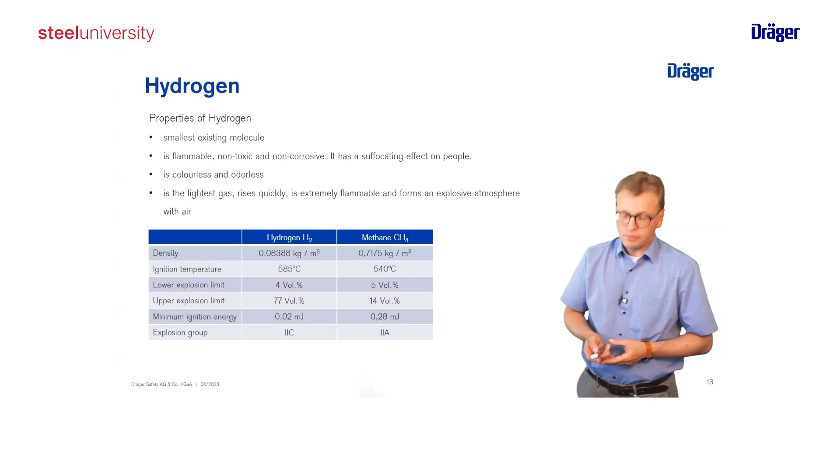When we speak about this, we have two sides. On one side we have the employer, you as a company using or dealing with production. On the other side we have manufacturers, like Dräger, who supply manufactured devices which can be used in explosive atmospheres. I will highlight now 3 standards which are relevant.

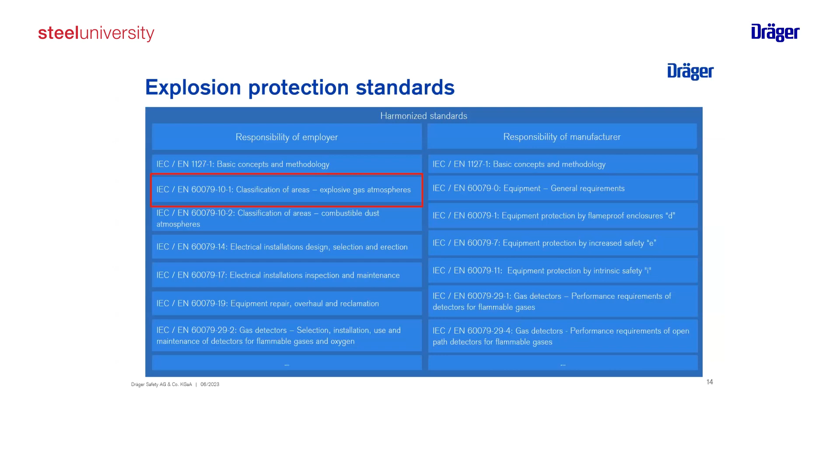The first is, if we speak about explosive gas atmosphere, we need to classify the areas so that we know how high the risk is, what's the probability that an explosive atmosphere can arise or be present. There is IEC EN 60079-10-1 for gases. Another one we will also cover in this presentation is IEC EN 60079-29-2. This is about gas detectors, meaning selection, installation, use, and maintenance of detectors for flammable gases and oxygen.

If you have guidance on how to select, I think we also need a standard which defines the performance, so to define criteria for detectors which can be used, linked to the selection process. So these are, I would say, 3 relevant standards, and later in my presentation we will see or hear about the content and meaning of these.

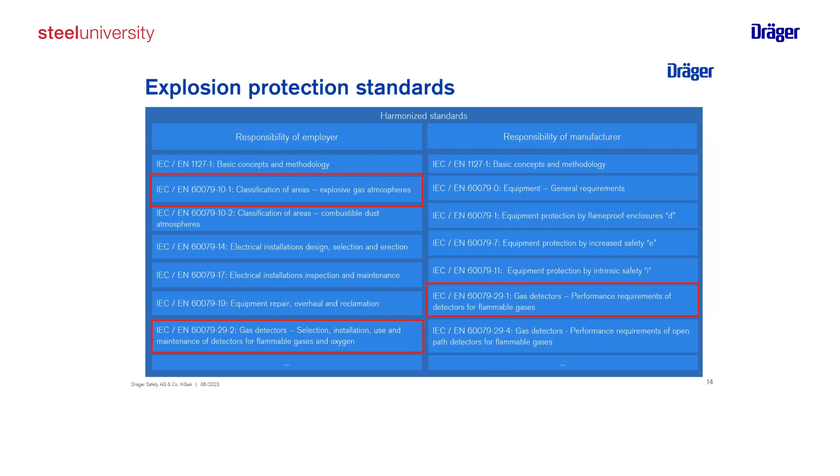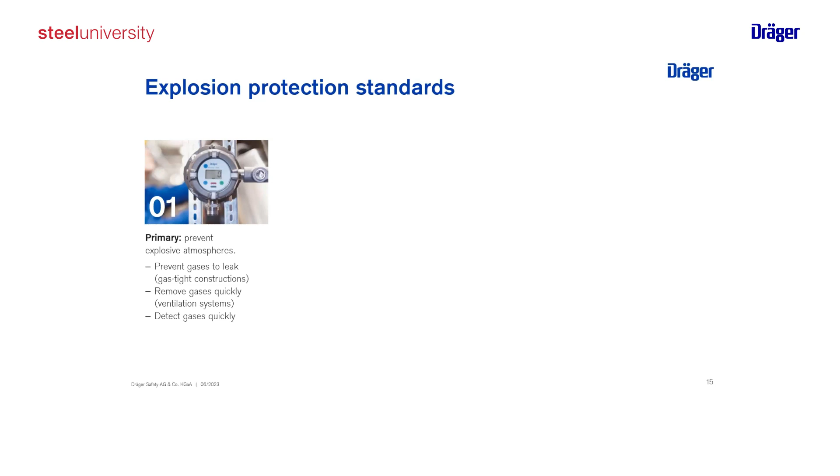Okay, so we want to do explosion protection, and what we always do there is speak about primary explosion protection. The idea is always first, we want to prevent explosive atmosphere. Or put it the other way around: you're dealing with substances which can form an explosive atmosphere, but maybe there are possibilities to prevent them from reaching a level where there is an explosive atmosphere.

This can be achieved by designing your processes or equipment so that they are gas tight, so the probability is very low that you'll have a leak. Or you use ventilation to remove gases from the application, or you use detection to pick these up and activate measures to keep the area free of explosive atmosphere. So this is the primary pillar - we want to prevent the formation of explosive atmosphere.

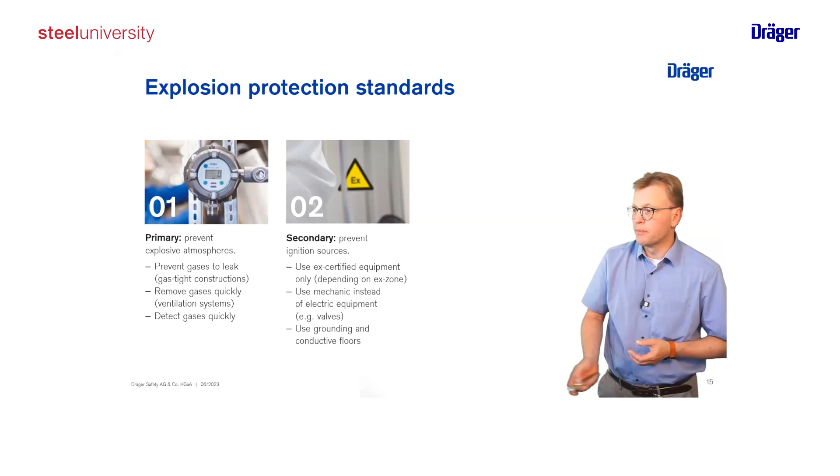The second, if we can't avoid this because it's part of the process that explosive atmosphere could be present, then at least we have to prevent that ignition sources are present - equipment which could ignite our explosive atmosphere. For this we use Ex-certified equipment only. When we define and have identified the probability of an explosive atmosphere and have defined the requirements for the equipment, we can select the right equipment which can be used there. We also have to secure that electric installation, grounding, etc. is done properly.

If this is all done, but nevertheless there could still be the risk of an explosion, then the third level is what we call constructive measures. So we design our application, our processes, so that the propagation is reduced, the effect of an explosion is limited - using materials which are fire retardant or fireproof, pressure release valves or breakthroughs in the wall, so the pressure is released and we don't have a collapse of the building.

For our presentation today, it's important that we concentrate on the primary pillar here - we want to prevent. And as we speak about gas detection, the good message is here.

I can't use the pointer. Sorry.

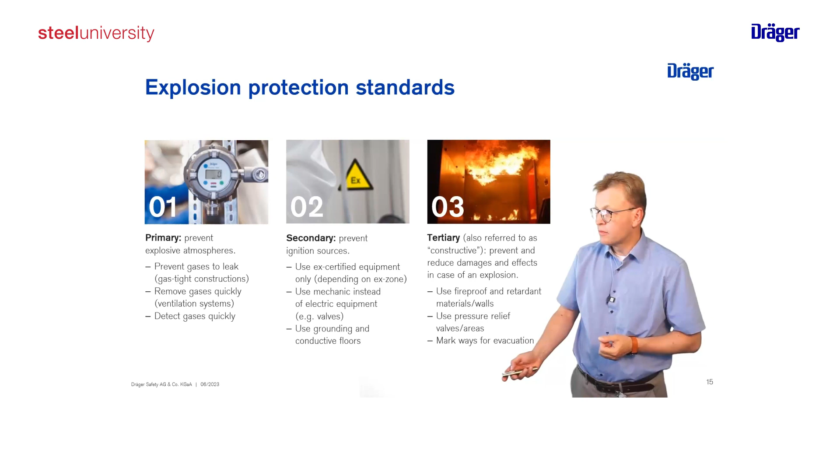So the good conclusion on the first step is you can use gas detection, as I said, so we can detect a possible explosive atmosphere. And gas detection itself is a measure to secure primary explosion protection, as we will see on the following slides.

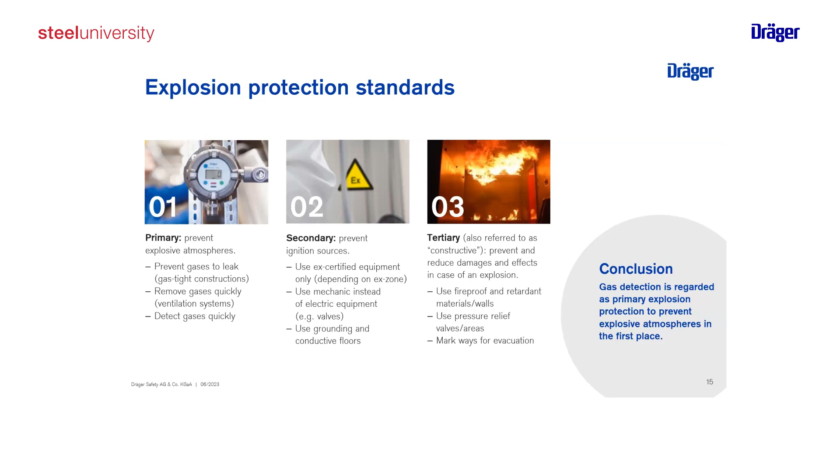Just to concentrate again on the primary explosion protection measures: on one side we have to look at the formation inside machines and apparatus, where we have an enclosed environment, and there we can easily measure the concentration and keep it below the explosion limits. In cases of high concentration, we can use inert gases to reduce the oxygen level inside, so that the third element needed to achieve an explosion is not present. But if you go this way, you need sensors to control the oxygen level inside your process.

If we want to concentrate on the outside of the equipment or plants, we speak about explosive atmosphere in the vicinity of plants or parts of plants. There we have the possibility by design, as mentioned before, to have a tightness installation, with different levels of tightness. It can be constructive and durable, so we can be sure it will not leak to the outside, but most installations like pumps and valves are only tight in combination with organizational measures. This could be frequent inspection, using a portable gas detector to control the atmosphere, or a stationary gas detection system installed there, permanently observing the atmosphere. If we have installations inside a building, we can use ventilation to dilute the concentration, constantly adding fresh air to reduce the concentration of our flammable substance.

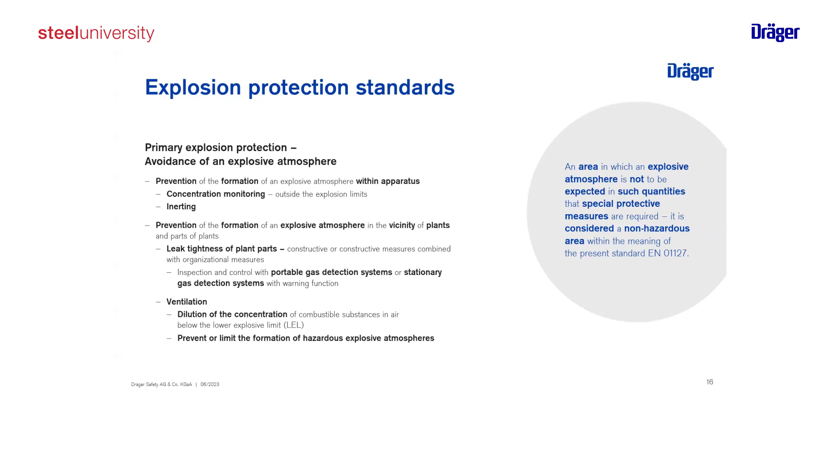If we are looking now at gas detection, so if we want to use a gas detection system for our primary explosion protection, then there are three types of gas detection systems.

The first is just a warning function. That means we have somewhere a sounder and a light which is activated in case of detection, and the operator needs to take measures - by having working instructions that people have to leave or switch manually valves. So this is just a warning.

The second step is using automatic switch functions. That means the control system will activate ventilation or will close part of the process, but the process itself will stay in operation.

And the last is what we call emergency functions. In this case, the process will be shut off and only systems relevant for the emergency and to keep a safe state are kept in operation. So we see a gas detection system can have a big impact on your process, but also on your safety.

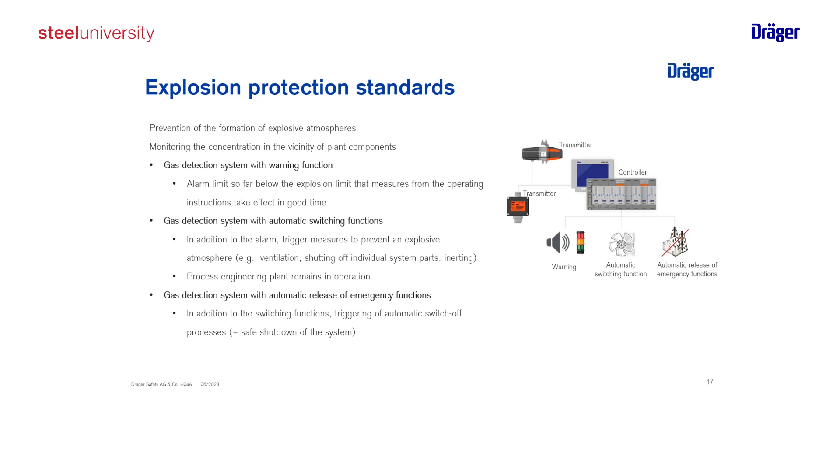How do we know how high the risk is or where to place a detector? We need to classify the area and identify the risk. Besides what you did in your risk analysis to identify that you have an explosive gas which can lead to an explosive atmosphere, we need to define its properties. This is done in the classification.

For this, we have the IEC standard 60079-10-1, which is a good guidance to run through. Interesting is there's a separate chapter about hydrogen, so special measures which should be considered when you deal with hydrogen in your application.

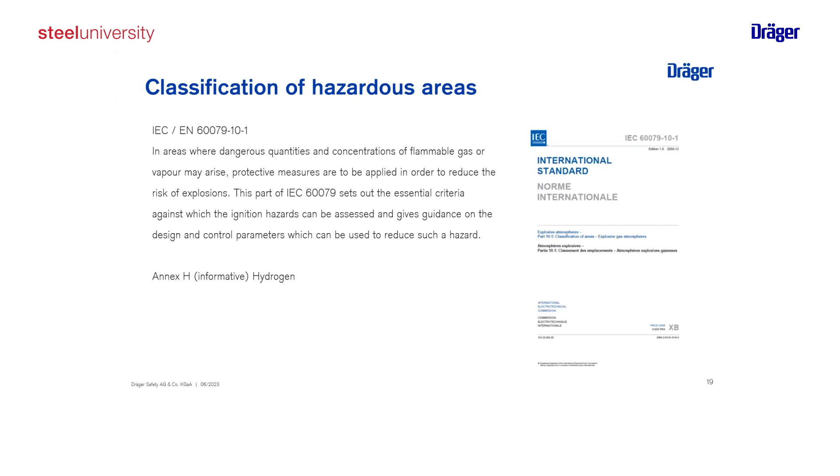Time is too short to give you a complete run through this standard, but the first thing is we need to consider the forms of the release, as hydrogen can be in different physical states. It could be a gas, it could be compressed, it could be a liquid.

So if we speak, for example, about electrolyzers, then when this is leaking, depending if it's at normal pressure, it could be just hydrogen as a liquid leaking out and then vaporizing. If you have a high pressure electrolyzer, it will be compressed gas. So you will have different forms of release of your hydrogen, and this needs to be considered in your measures.

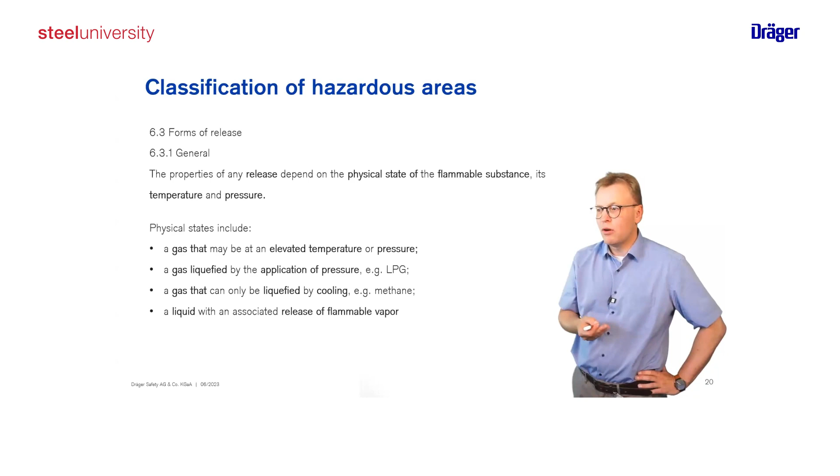And so if, for example, you have ventilation or your building is in an open design, you will have the effect that the air coming into your room will either distribute, or with the air movement, at least dilute your explosive gas.

So we have two basic functions we want to achieve with ventilation. One is we want to increase the dilution by adding or moving the air, to bring down the concentration of the explosive atmosphere. And we want to avoid that the explosive gas is expanding in your plant or area, so we want to limit the extension.

The other function is that by using ventilation, you can classify an area as a zone. And if the ventilation is an active measure, you can also declassify it to a lower level - instead of having a zone 1, you have a zone 2. Or if your ventilation is perfect, you can bring it to a non-zone.

Important is you always need to consider how the air movement is inside, and if you have blockages or obstacles which could prevent the gas release from escaping, or prevent us from detecting it. So it's important to consider possible air movements, air streams, and ventilation, as this has a direct impact on how our explosive atmosphere or gas will vaporize in the room.

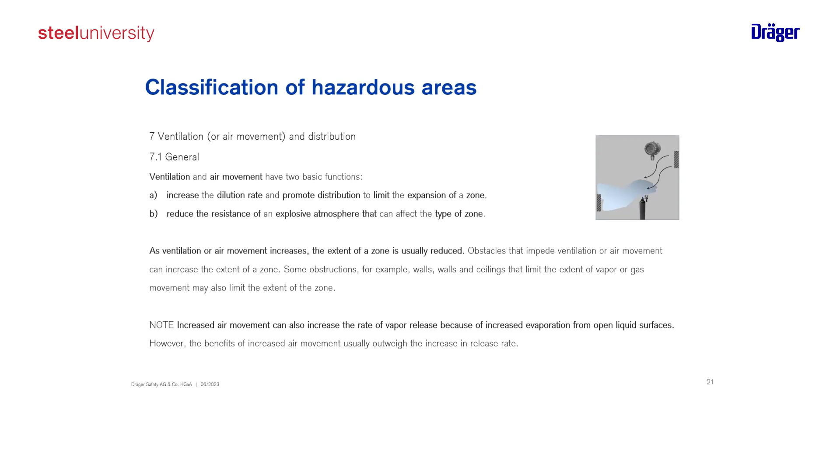The resulting zone here is no zone, as we don't depend on any kind of control system. Depending on how reliable your system is, it will also impact how you design or what the resulting zone is. Nice to know - if your resulting zone is a no zone, you don't need to use, for example, a drive or light which is explosion protected, because your design of measures always secures that no explosive atmosphere can build up, so there's no necessity to select Ex-certified equipment.

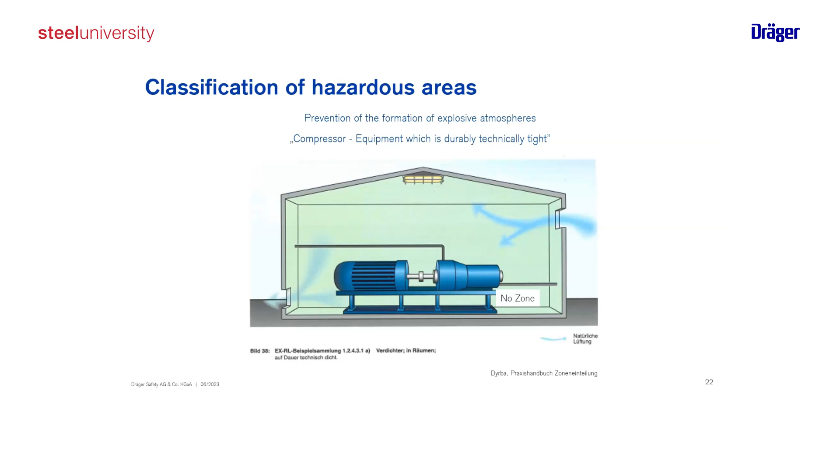I mentioned that there is an appendix about hydrogen. Also in the beginning, we talked about the ignition temperature of hydrogen being close to methane. So if you're using methane or propane, you know what the temperature impacts of your equipment are, so that a hot surface will not ignite a possible leak.

But what is different is that hydrogen has a different density, so it is the lightest gas. It will rise up immediately, and if it's in a closed area, you could have an accumulation of gas in overhead spaces, especially if you have a closed roof and areas which are not well ventilated, the gas will collect there and stay since there's no air exchange.

That means if you know already from the design of your building or plant, you need to consider possible areas and also how you want to secure correct ventilation, or by adding separate windows to the roof, which you can activate, for example, when you place a detector close there, controlling the gas concentration at all times.

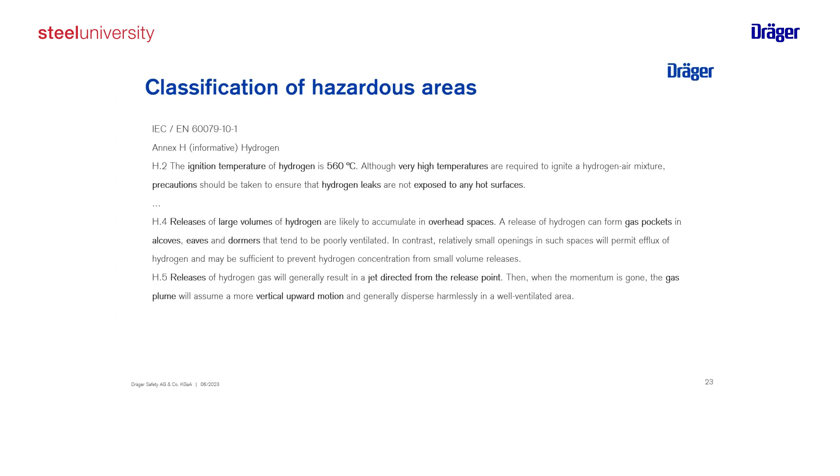Also important is, for example, when you have hydrogen as a compressed gas and this is released, you will have a jet which goes first straight out of the leak, but due to the density, it will very fast go up. This is different from other gases, like CO2, which will collect on the ground.

This leads to point 8 in this appendix about positioning, as mentioned before. So depending on whether we have just a normal room where we have a leakage, the gas will go up and we should position a detector close to or higher than the expected point of release.

When we have ventilation involved, the detection should be very close to the area where we want the exhaust or the release point to the outside, because there's the highest airstream. The probability here is highest that the detector can pick up the gas.

For gas detection, it's always important, especially with this kind of technology, that the gas needs to reach the detector. So if the ventilation moves gas molecules a different way, the detector has no chance to pick up the concentration, or the concentration indicated could be very low and not represent the actual situation.

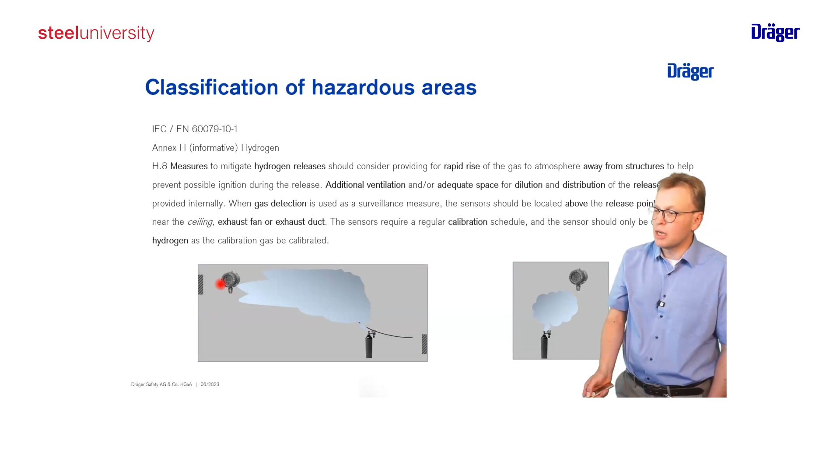When you position detectors, you need also to consider that they need maintenance. You need from time to time to check and calibrate these. So the positioning should also be done in a way that you consider the work of your maintenance people.

There are possibilities using equipment, for example, we offer a remote calibration adapter so that you still have a point detector under the roof, but by using accessories, you can apply the test gas concentration or calibrate the sensor from the ground. But this needs to be considered during your design phase.

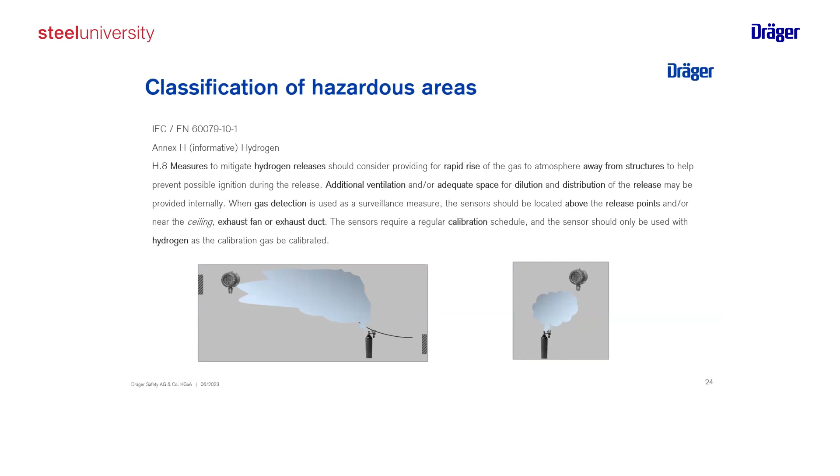Coming to the third part of my presentation, this is about how to select the detectors, because we want to detect flammable gases and especially now hydrogen.

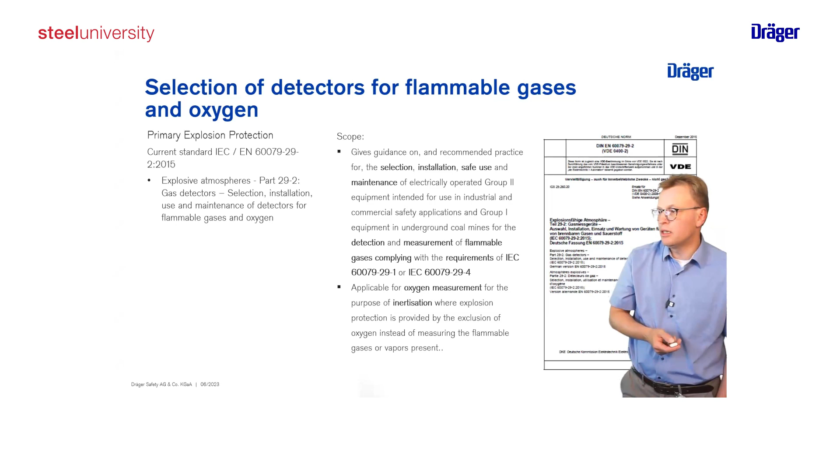There's a standard, 79-29-2, about the selection, and right in the beginning we see the scope, which is that the requirement for using gas detection is that it needs to comply with 29-1 and 29-4. 29-1 is for point detection, 29-4 is for line of sight. So if you follow this guidance and use this for primary explosion protection, the equipment selected based on this should be compliant with these performance standards.

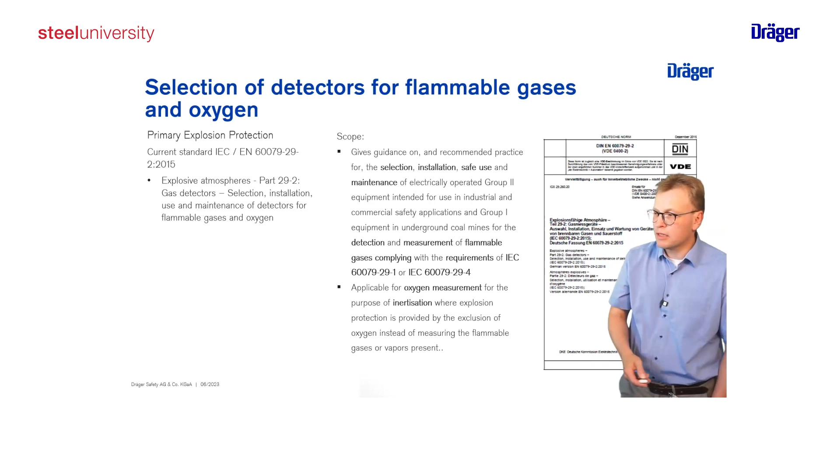We come in the next chapter to this performance - what kind of technologies and sensors can we use based on these standards. This is on the first slide. We concentrate on the flammable gases here, so we always try to stay below the explosion limit.

So there are catalytic bead sensors, infrared, semiconductor, electrochemical, FID, PID - these are typical sensors which can be used for flammable gases. But if we want to detect hydrogen, and we come later to the sensors themselves, we can mostly concentrate on two sensor technologies: catalytic sensors and electrochemical sensors.

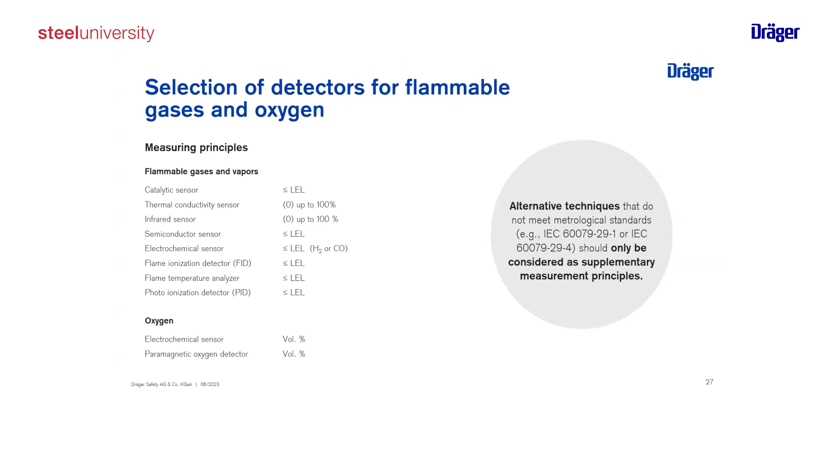You can also use FID or PID, but this is not typical for primary explosion protection. What is important to know is there are new technologies stepping into the market, like ultrasonic leak detection, IR cameras, etc. You can use these, but only as supplementary. If your safety concept is based on certain detectors, you can't replace this with the alternative, but you can add, for example, an ultrasonic gas leak detector, to reduce the amount, or to have a higher reliability of your system.

What the sensor is measuring is not the CO or O2, it's measuring the electrons. So we generate electrons, and this is a proportional indication of the gas which is oxidizing or being reduced. That means our measurement is not the gas itself, it's part of the process. This leads to the effect that you could have a similar reaction with other gases, and that's the reason why sensors have cross-sensitivities, because a similar gas can lead to a similar reaction, creating electrons which we measure. So electrochemical sensors are always not selective. You can limit the impact of cross-sensitivity, but due to the chemistry, as we measure a production product like the electron, you always have the impact or interference of other substances.

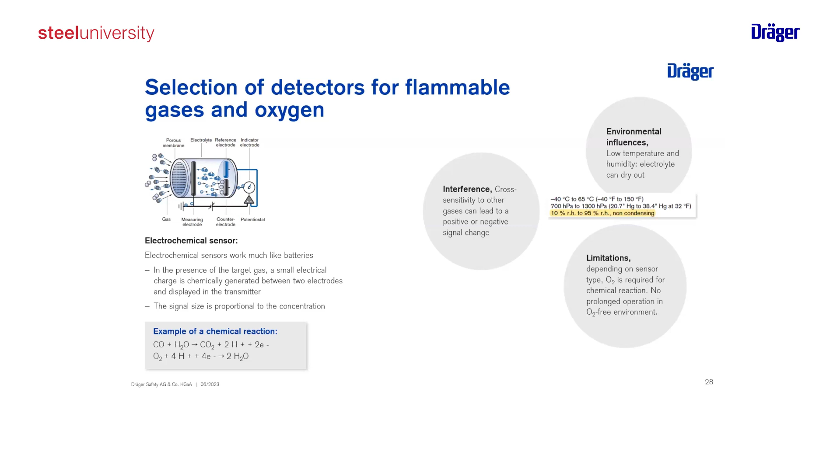The other principle for detecting gases is the catalytic bead or catalytic sensor. We again have gas molecules which vaporize, in this case through a flame arrestor. We have an active hot wire, and what we do is an oxidation, a reaction of, in this example, methane, could also be hydrogen, with oxygen. We generate CO2, water, and part of this is a heat of reaction. So we add energy, but as part of the combustion, we get additional energy. The heat of reaction leads to an increase in temperature of this wire, and this temperature increase is our direct proportional measure for the amount of gas inside. As you can see again, we have an indirect measurement.

That means we are not measuring directly the gas molecules, we measure the amount of energy which is generated. So that means we are not really selective.

We can be, I would say, partially selective by selecting the sensitivity or the heat of the pellistors, but nevertheless it's not very selective. As we have here in combustion process, we need to secure that this combustion is limited to the sensor. So the sensor is typically designed as a flame-proof or explosion-proof enclosure with a flame arrestor in front. Like the EC sensors, we need always oxygen, otherwise we have no combustion.

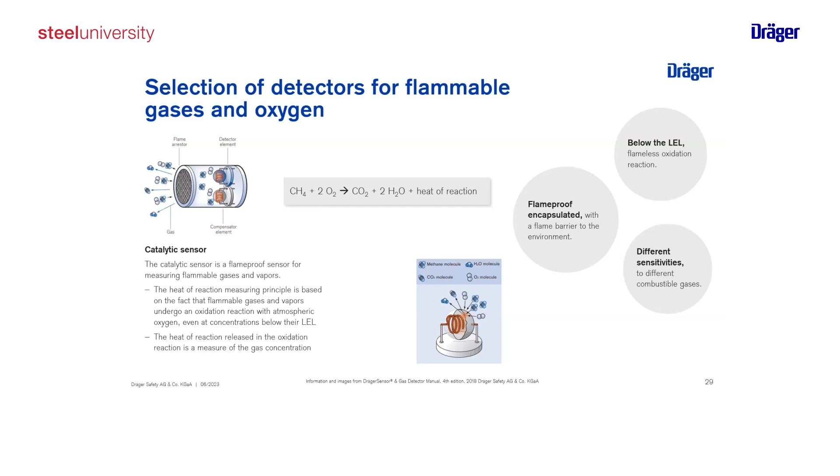As mentioned, we have always the oxidation process with our gases, and mostly it's hydrocarbons, but we can also detect by this hydrogen. And depending on the molecule structure, we get different signals, which are related then to the thermal reaction.

So when you use sensors like this, the best and safe way is always to calibrate, to adjust the sensor to the substance with the lowest sensitivity you are expecting, to always have the correct signal on your side.

Important is also to know that these catalytic bead sensors can only operate below the lower explosion limit, because here you still have a mixture with the oxygen and the flammable gas, which can be combusted and give you a linear response.

And in the moment you are crossing the lower explosion limit, the signal what you will get is not linear going up, it will go down, because then we have the situation that the amount of oxygen is not sufficient anymore for this process to give you a linear reading.

So the sensors for this type are always limited to just the lower explosion limit. And we need minimum 10 volume% of oxygen so that we still can create this combustion process.

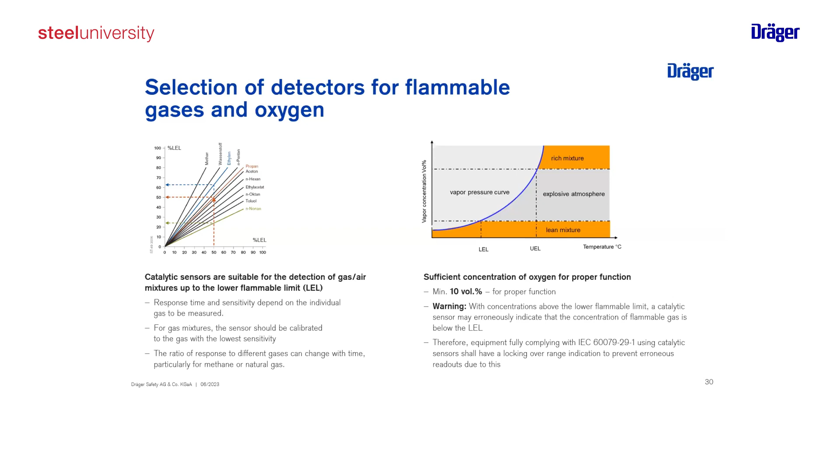So in sensors, it's also mentioned the standard needs to comply. The sensors are tested according to the standards, how linear, how reliable is their signal. We come to this in detail in the last chapter.

So just very fast to summarize: what is your checklist when you think about combustible gas detectors? We need to know what kind of flammable gases or vapors in which concentration are present, because this defines which technologies you can use.

Are there other gases or vapors present? Because you have cross sensitivities, or maybe you need also to select a different calibration. We need always oxygen and a sufficient amount, and not an oxygen enriched atmosphere, because this leads to other effects.

What is the measuring range? It means what concentration the device should indicate. Response time, for example, because with these principles, a catalytic bead sensor can take up to 30 seconds before you get your alarm. So you need to consider this if you have any kind of measures which should be activated.

We need to consider ambient conditions, temperature, pressure, etc., but also the atmosphere around. Dust, poisoning substances, etc., have an impact on selecting the right sensor, but also maybe on using accessories to protect the sensor itself.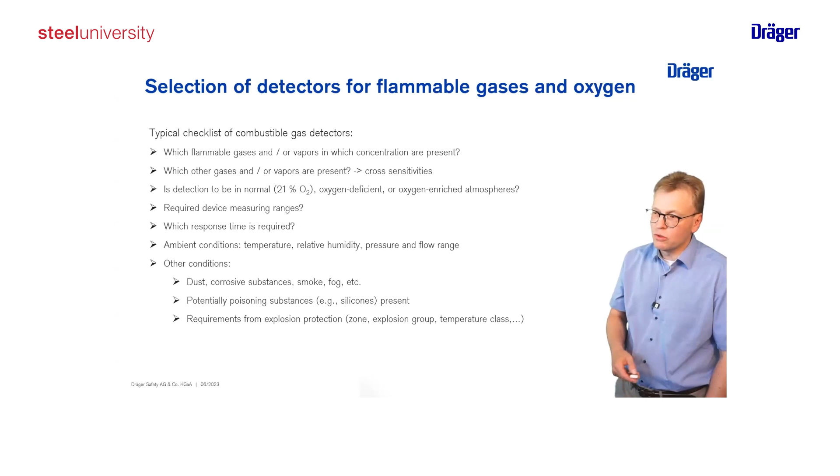Coming to my last part of the presentation, this is about performance. As I said, if you select equipment, and this is also written in the standards, we need to use reliable equipment. And how you can identify this, or what is the performance approval looking at? So we have two elements.

On the one side, we have the detector in the field, in the hazardous area, and we have our control system. So on the one side, we have the requirement for explosion protection. The device needs to be certified and tested accordingly. And you find this by the marking on the device or by the type examination certificate, that this is then accordingly stated there, that the detector, for example, can be used in zone 1 here for gas atmosphere.

If you use the sensors here for primary explosion protection, so that you measure gas concentration and you have a control system which activates, for example, any kind of switching of a ventilation or also for emergency shutdown, then the control system has also a big impact on your complete system here.

And that is a requirement if we talk about primary explosion protection for the 29-1, that not only the detector is tested and approved, but also your control system, because you need to secure that the signals the sensor is providing are correctly understood and interpreted by the control system.

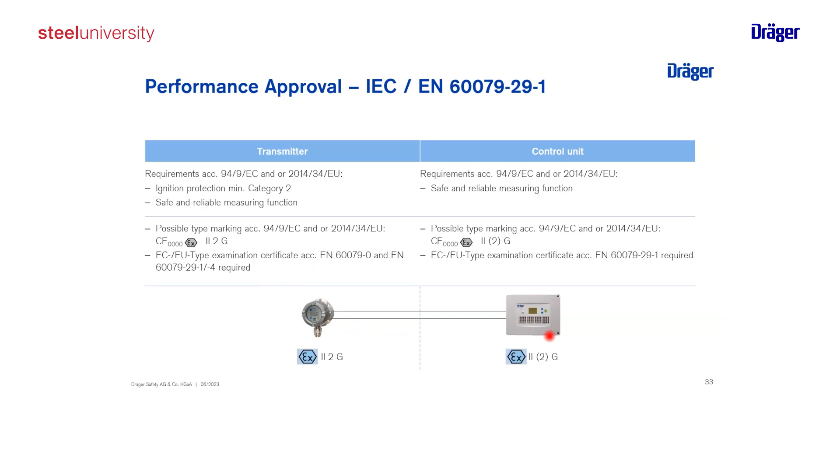If this control system, what we call associated equipment, can be connected to a device in the field but is not intended to be used in a hazardous area, you will find, especially in Europe, a marking that indicates it can be connected to a device in an explosive atmosphere but is not intended to be installed there. In the ATEX world we have round brackets; if you look to the IEC, you will see square brackets, because the interface here is interfering with the device in the field and is also interfering with your measures.

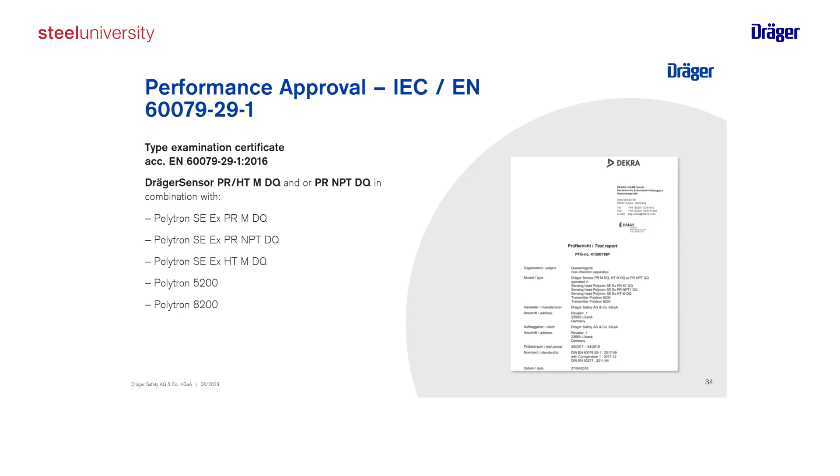If a device is approved and certified by a notified body, for the IEC or the EN, you will get a test report in combination with the certificate. In this case, I took a sample from the DEKRA for one of our products. You will find on the report the different products which have been tested by the notified body, and which standards were within the scope.

And here we talk about measuring performance, and also which date, because when we look at standards, they always have a release date, and after a certain time you will find an update, and then you need to apply for an update of your certificate.

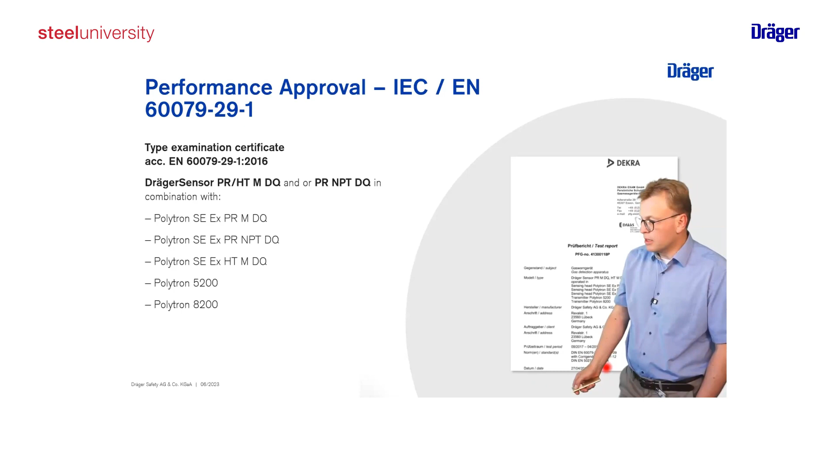But it's not only sufficient to have the standard listed on your certificate. It's also about, because we want to measure certain substances as primary explosion protection, making sure the gas you want to detect is as well part of the certificate. In this case, it's hydrogen. So if we want to use gas detectors for hydrogen detection, I could only recommend having a closer look to the certificates of the devices to see if hydrogen was also tested by the notified body.

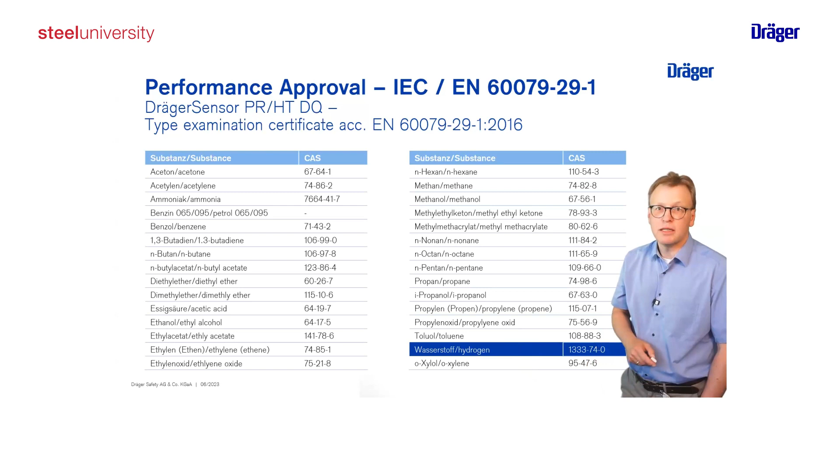Great insights here on the topic. And if you now have the feeling that there's quite some complexity in this topic to ensure plant safety, don't worry, there are experts like Gregor who would like to support you on your way. And that's leading us to the last couple of slides for today, because I would like to show one reference case we recently had together with a company. We started for a couple of minutes, and that's Salzgitter Flachstahl GmbH in Germany.

As I said, there is a project phase regarding hydrogen, green hydrogen production, and direct injection. The positive part is that we came into this project in a very early phase, not at a moment where a quote is needed, but in the phase where the risk assessment has to be done. And there we were more than happy to bring in our expertise on this topic, but at the same time learn about this very important application where a lot of steel companies are.

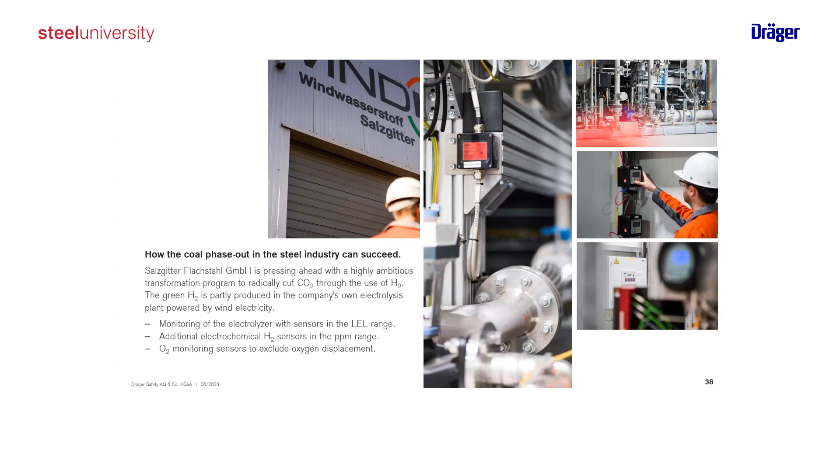So what we did was a holistic safety approach, safety workshops on it, and we came to the point that in the end we need three important elements. First of all, we need to detect H2 in the hall of the electrolyzer and detect it in the LEL range, the lower explosion limit range.

Additionally, we need some H2 detection in the electrolyzer at a low level of concentration, a ppm range, to detect, for example, leakages in a very early phase. And last but not least, there's the need to monitor oxygen, because there is some nitrogen involved in this technology, and here we have to make sure that there's no oxygen deficiency as a threat for the workers.

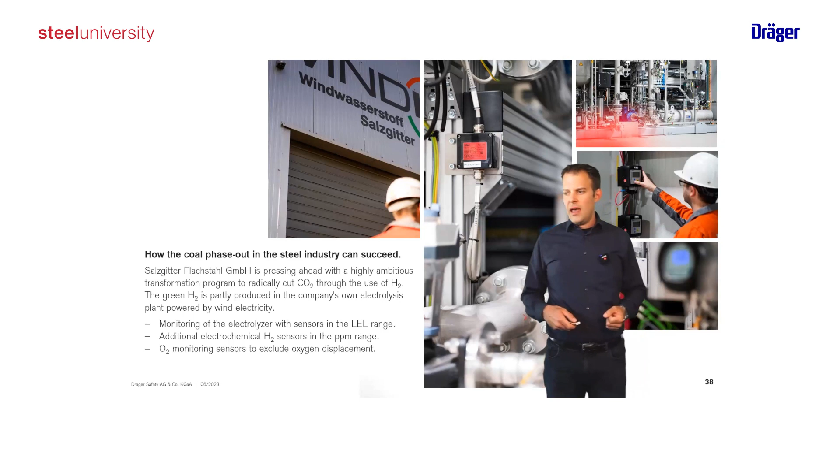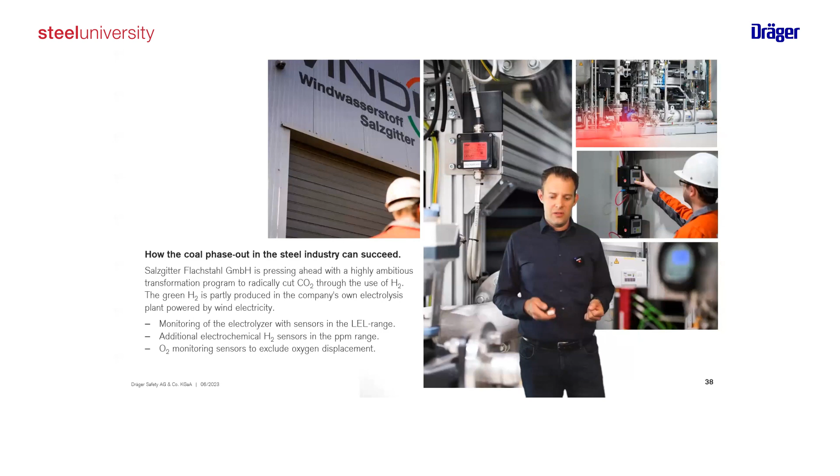And of course, all of this within the framework of maintenance, training, and service, because knowledge is key. And that's leading us now to the end, the right keyword, knowledge, and we really hope that we could bring some good insights here today to you. Okay.

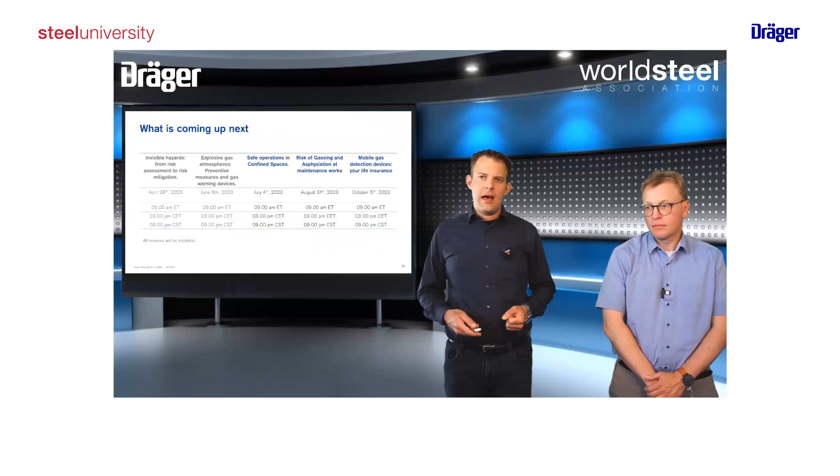And before we come to your questions, I would like to give you a short outlook because there's more to come. The next session will be focusing on confined spaces on the 4th of July. Then we will have a deep dive into the special risks in maintenance work. And then we will get a bit more operational about the right usage and maintenance of mobile gas detection devices. So stay tuned, there's more to come. And all sessions, as you might already know, are recorded or will be recorded. So there will always be the chance to have a look at them at a later point.

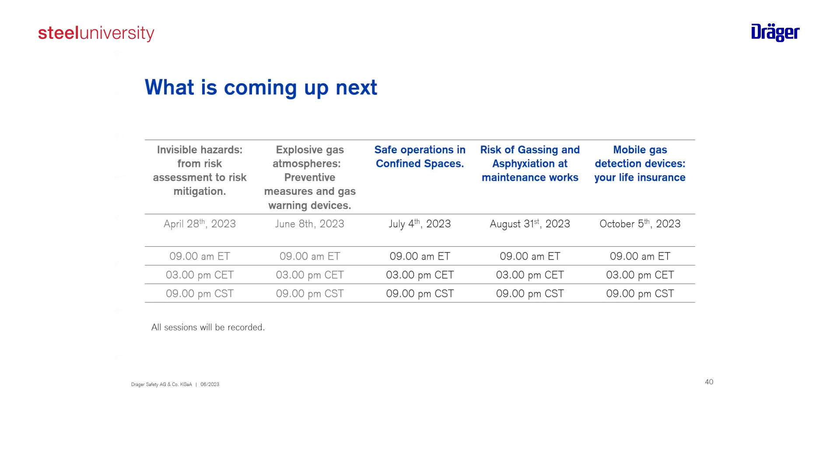Thank you, Oliver. Thank you, Marcus, for, I think, an excellent presentation. You touched on some of the real key topics around hydrogen in particular, and I certainly learned a lot about how sensors work, which I was largely ignorant of up till now. I saw them rather as a black box. So thank you for that.

We do have a number of questions, which hopefully we can take some time to run through, and maybe I'll start at the top. You talked about in your presentation around positioning sensors, and it's important to put them in the right place. How can somebody who's wanting to use gas sensors ensure that they're correctly locating them?

Okay, so when the risk analysis is done, you know which gases could be or will be present, so that you consider their properties, like density, flashpoint, etc. And you have selected the right detector so that they're capable. You need to think first about whether the gas is heavier or lighter than air, and in which form the gas or vapor will be released. That means, will it directly go up or go down, or will it take some time? But also in your design, do you have natural ventilation so that the gas could be distributed? This needs to be considered.